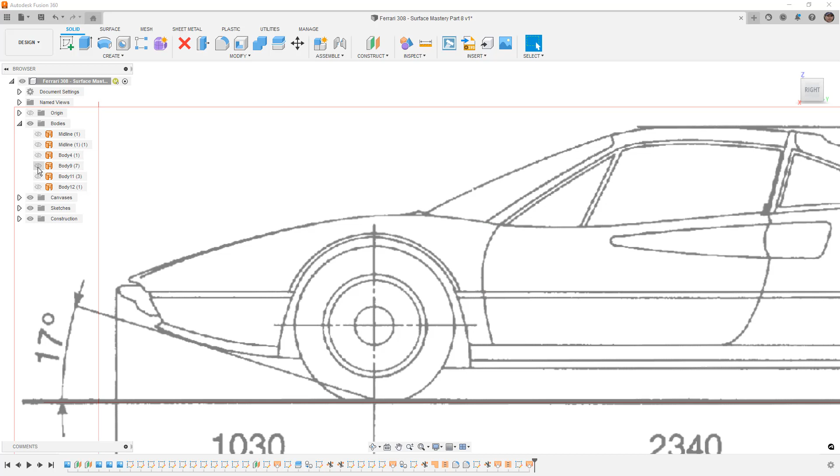This is the one that we had. Basically, we used a loft to go between one edge and the other. And the reason we're going to do this is because I want to carry on using that midline. The midline is going to be important to us because we want to use that as our reference going down to the lower portion of the fender.

So we're going to start with the back section. I want to go into my sketches and find the sketch that I used to trim out the opening. Now at this point it can be pretty difficult, because if we go back through these sketches, we might not necessarily know which sketch it is. In this case, sketch 16 has the original curves.

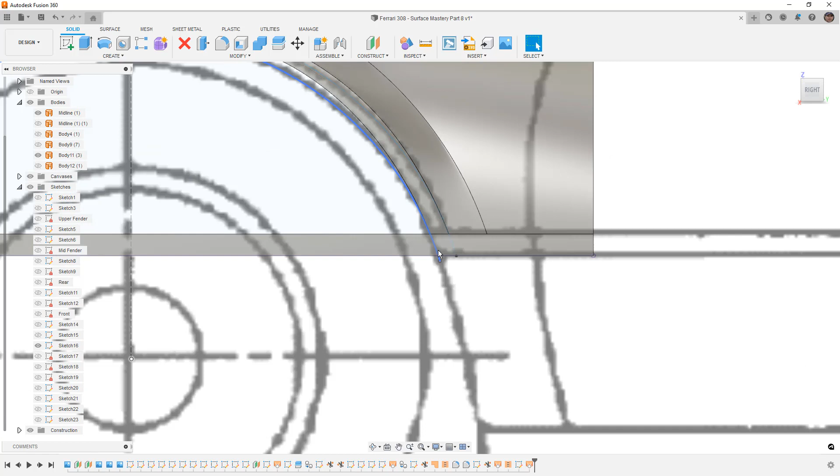What I want to do is cut out this inside portion here. The reason I want to do that is because I'm going to focus on the back section here as one piece and the front section as one, because the front is actually slightly difficult because of the way that the geometry is created here. So we're going to have to take a little extra care there.

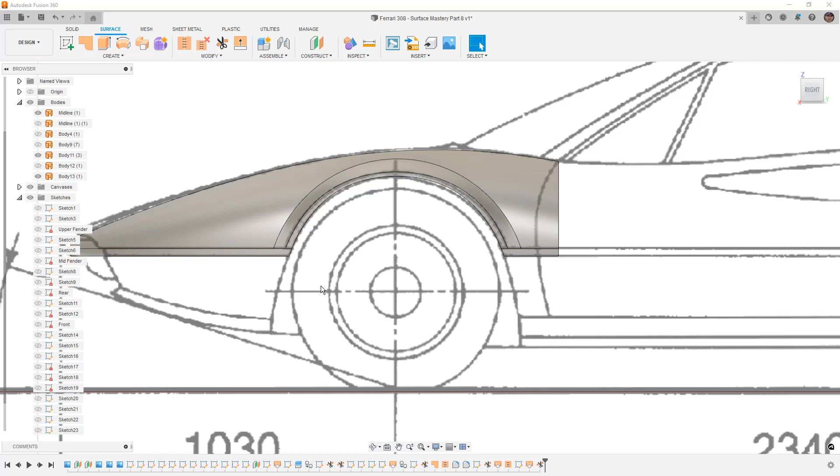So I want to use this as a trim tool. We'll go to our surfaces, trim. The trim tool is going to be that inside arc, and then we're just going to remove this inside piece. We're not going to need this surface anymore after this, so we don't need to worry about maintaining a copy of it.

The next thing we want to do is remember that the midline of this car—this is actually a recessed or sunken-in section. So we're not worried about carrying the curvature from the upper portion of the fender to the lower, but that's why we saved this extra piece here. We overbuilt the original fender so that we would have this as a reference.

So we're going to carry this edge down and follow the straight line, even though I know that's not the door seam. It doesn't necessarily matter when you're building out a car.

So the front section is tricky because we will need to trim some of this away, and we didn't perfectly follow the curvature of the car, but that's okay because we're not going to be too worried about that. But we are going to talk about how we can build out this front lip section, because this piece here actually rolls. It's not a hard edge, it's just very smooth and gradual on the car, but it does roll forward. So we're going to take a look at how we can try to accomplish that.

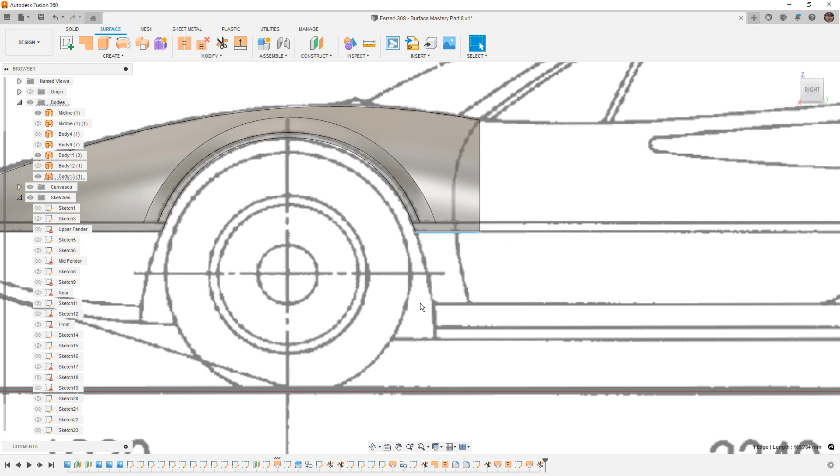But let's get started by sketching on the back side. So we're going to start a new sketch. Just pick any sketch plane you want and enable your 3D sketch. When we do this, we want to include some 3D geometry. So from Create, Project Include, select Include 3D Geometry.

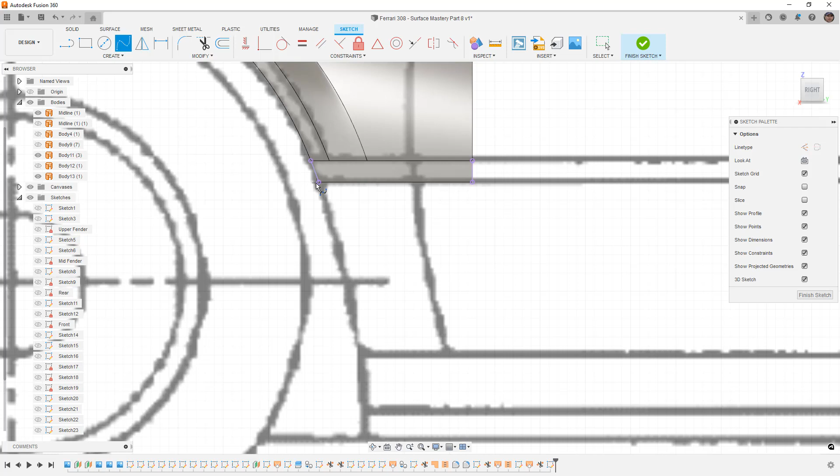And we want to select the edges of our midline surface. I'm going to right click and OK. Then I'm going to create a spline and try to snap to that point. You'll notice it's not snapping to those points here. If I rotate this around, I need to rotate it just slightly in 3D, and I'm just going to bring this line down, say OK.

We'll do the same thing here, bring it down, and say OK. So if we rotate this around to the front, what we should see is that those go straight down, because even though we're sketching in 3D, it's going to assume that it's planar unless we snap to a reference. That's why we needed to snap to those points first.

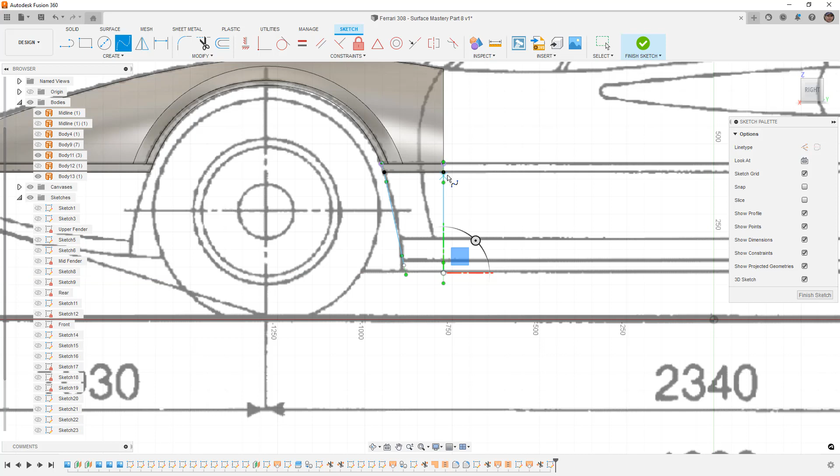I'm going to hit Escape to get off my spline tool, and build this all the way down to the bottom, even though this portion here is where the door opens. This is sort of the break point between the front fender and the sill. The sill on this car is going to be a separate piece. It's part of the body, but it's going to have its own change in curvature. We're not going to worry about it for this example - that's not really the point of what we're doing here.

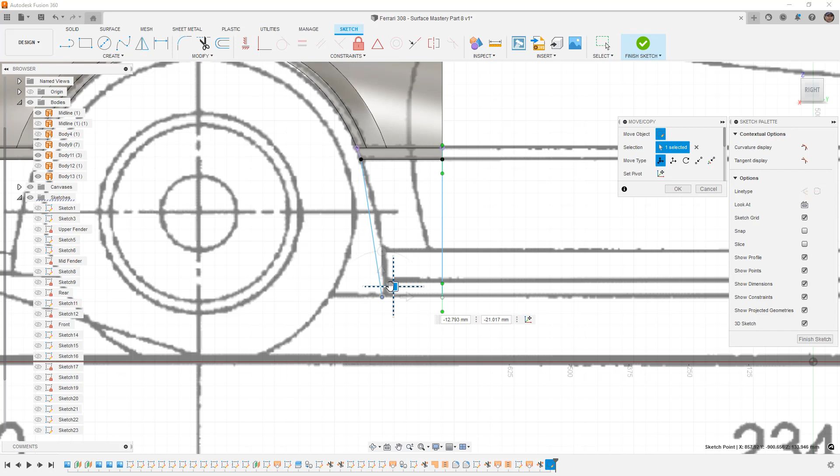But we do want to move these points down, and because we're in 3D, we can't just grab and move them like we can in a 2D sketch. We need to use Move Copy, which is M on the keyboard, and that allows me to move it. When we're using Move Copy, these handles right here, we need to activate the handle, and then we can use the Move Copy on the handle itself. The one on the back is not really going to be too much of a problem.

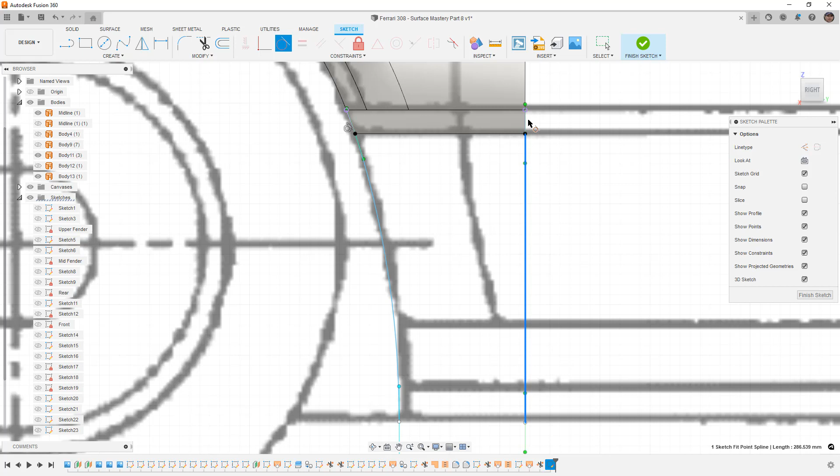Right-click and say OK. Next we want to give tangency to the spline relative to that 3D curve, and we're going to do the same thing over here. Even though this is vertical, I want to make sure that I do still maintain that. Hit Escape to get off our constraint.

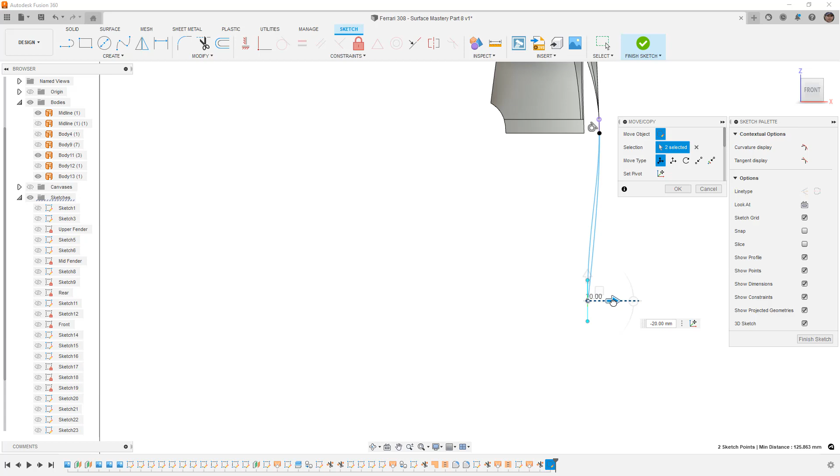We're going to rotate this around to the front. I'm going to hide my canvas for now - I don't really need to see it. But I want to take both of these points and move them inward. So I'm going to select them, say move, and just pull them in a little bit. And you'll notice how this messes up the splines - it messes up the curvature.

Now what happened here is the spline that we activated the handle on is going vertically because it was activated and it was in plane. It was basically just a 2D plane that was offset from the original origin. So this means that I need to use Move Copy and change the curvature of that. Now what I'm looking for is to get a nice gradual transition here.

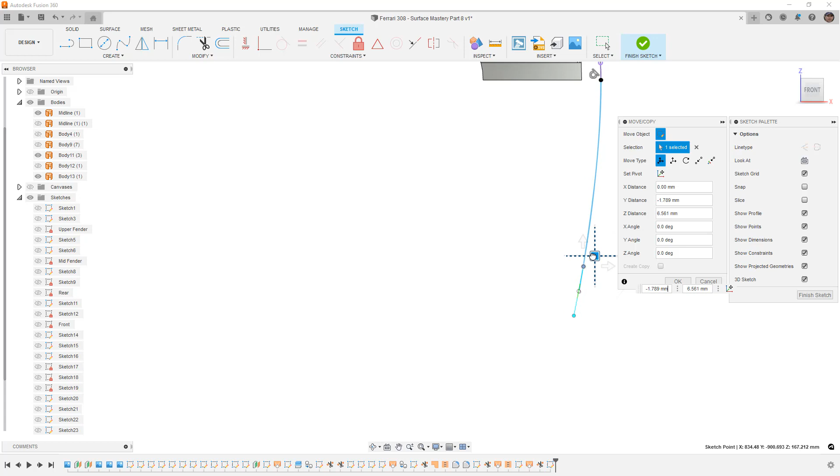Hit Escape. Actually, let's go ahead, hit Move on that. And here is where I really dislike doing this in 3D. I'm going to go ahead and move that around. Then we'll have to say OK.

The one that we didn't activate the handle on, that's essentially a vertical line, that one is essentially fine because it's going the path of least resistance. So essentially when you think about splines, if you don't activate a handle, it's going to try to invoke the curvature throughout the entire thing.

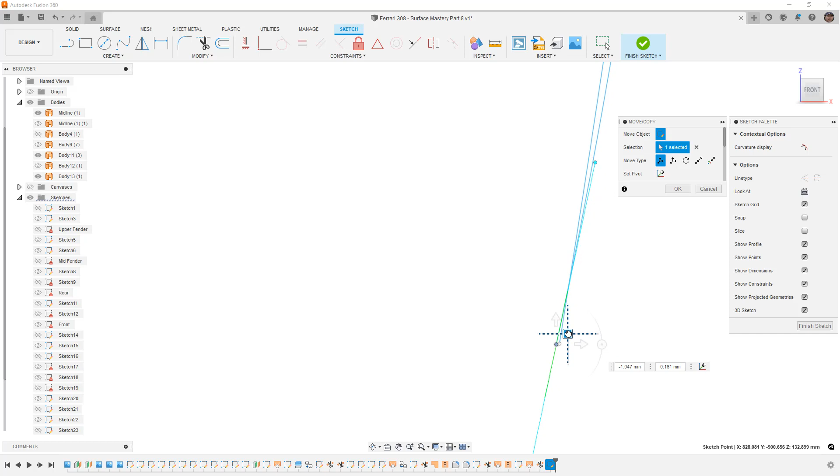We do want to make sure that these are essentially horizontal with each other. It doesn't have to be perfect, but I want to get them relatively close. I'm going to say OK.

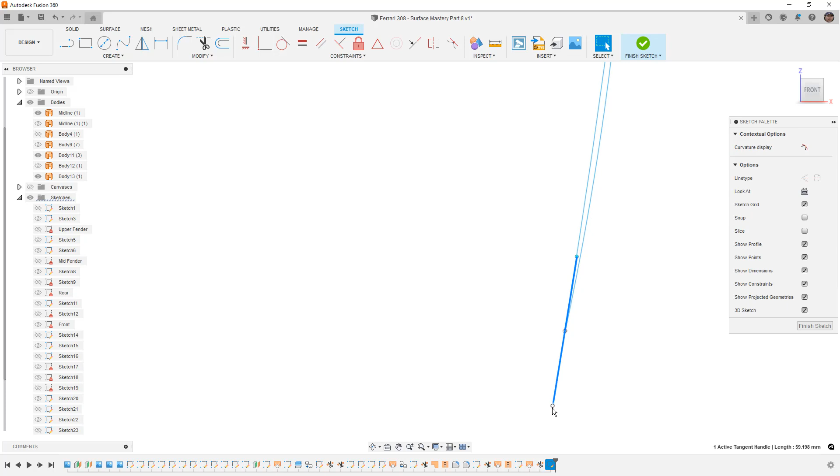I'm going to select this back one. I'm going to activate the handle, and say move. You can see that it's going to move the entire thing. But then what I want to do is move that to the handle itself. Right-click and say OK. Select the handle, one of them, and then hit move. And now I can move the handle around. So again, we're just looking to get them relatively close.

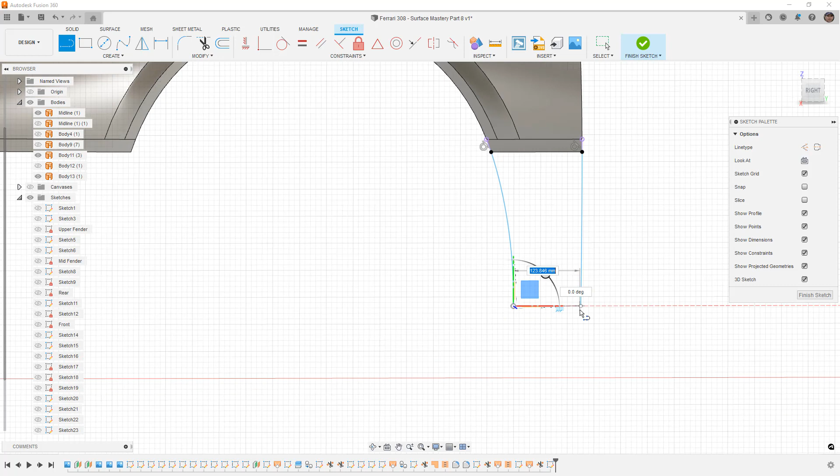From the side here, it looks pretty good. And again, we don't have to worry too much about it being a perfect line, but you'll notice that when I try to use the line tool in plane, it's not letting me select those. If I rotate it slightly, it will let me create a line between those 2 points. That line is not going to be horizontal.

If I try to use a horizontal constraint, you can see now it's added that horizontal constraint and those handles are active. If I look at it from the front, that line or those 2 points should be in a perfect line with the y-axis now. So that looks pretty good.

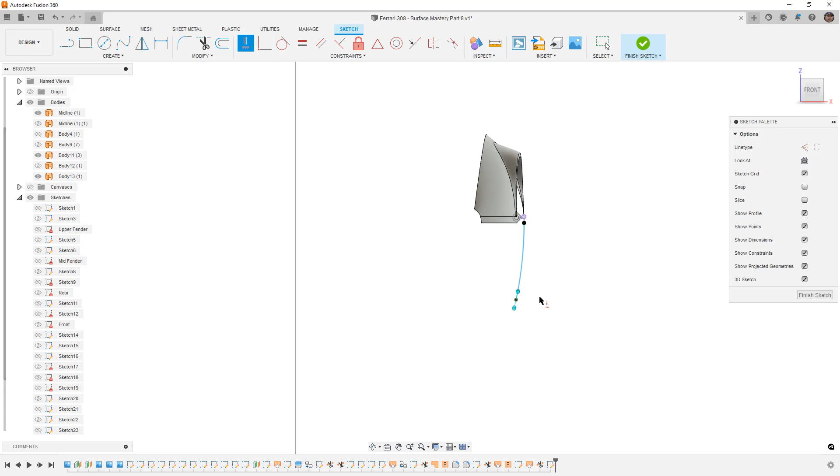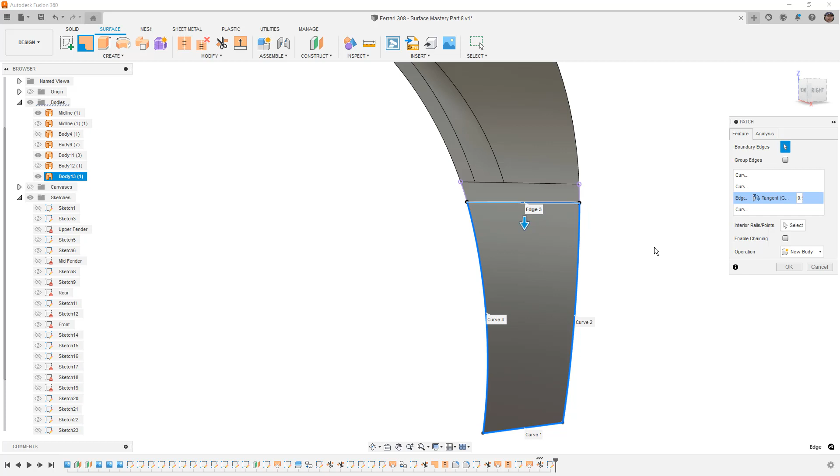What I want to do from here is finish my sketch. We can try to use a patch. We can turn off our enabled chaining, grab the bottom edge of this surface, and then grab each of these 3D splines. For this edge, we can use tangency. Because the 3D splines have tangency with the edges, with the projected or 3D included edges, we should not have any problem maintaining that curvature. So we can say OK, and now we've built out a 3D surface.

Then what we can do is take this piece and we can either offset it. Now the problem with offsetting, and I'll show you this as we look at it from the front, is it's going to go the direction of curvature. In this instance, because that upper edge is vertical, the tangency was vertical, it's not going to make too much of a difference for us.

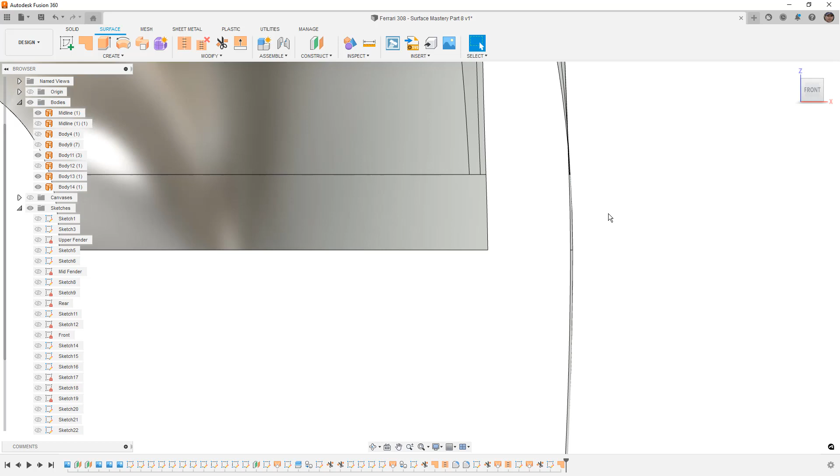But usually a better option is to select that surface, use Move Copy, and move it directly in the X direction. The reason that's a better option is because we can control which direction that's going. You also can do things like create a ruled surface off of these edges toward a direction.

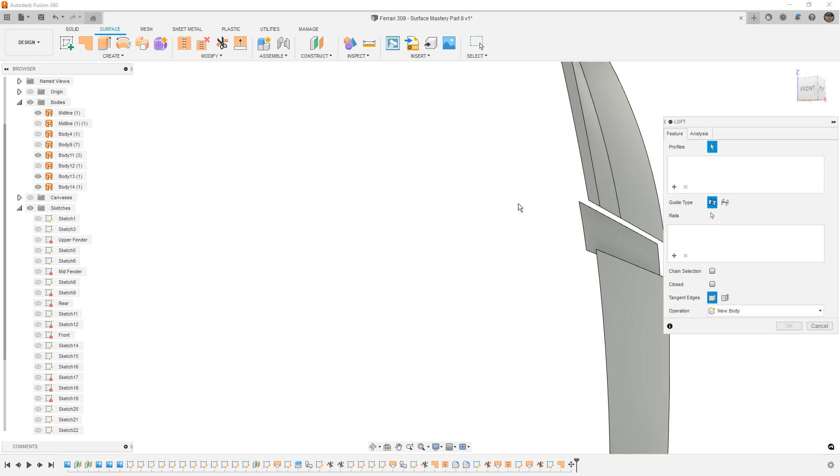In our case, what we're going to do is create a loft going from these 3 edges, which should be connected, to this edge here. We'll say OK, right-click and repeat that, and now go from one edge to the other, say OK, and we've sort of built out that little recess that we see on the body. That little piece that we kept was important because we needed it for the curvature, but now we're able to simply build out that little piece that is going to be recessed in the body.

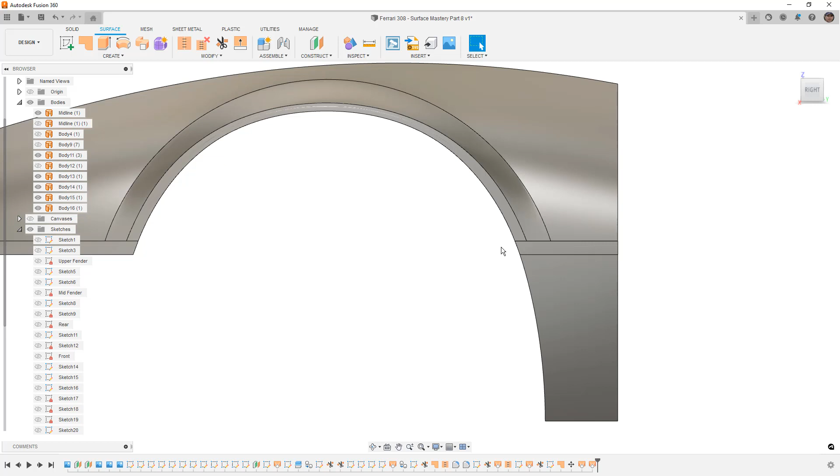That part was the easy part. The front part is where things get a little tricky. Now we have to follow the same process, but first let's go ahead and trim the front of this. To do this, I'm going to use a 2D sketch. The 3D sketch option can be on, that's okay.

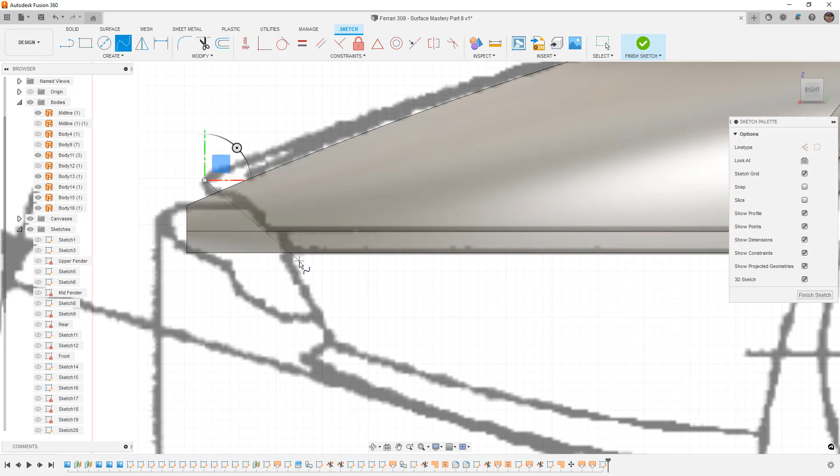But in this instance, what I want to do is just make a spline that's going to allow me to cut this. Because it's still in 2D, I can go ahead and manipulate the handles and then use it as a trim tool. I'm going to get rid of both of these front pieces. That allows me to use that sketch and ensure that I do have curvature, continuity, or tangency as we go across that trim.

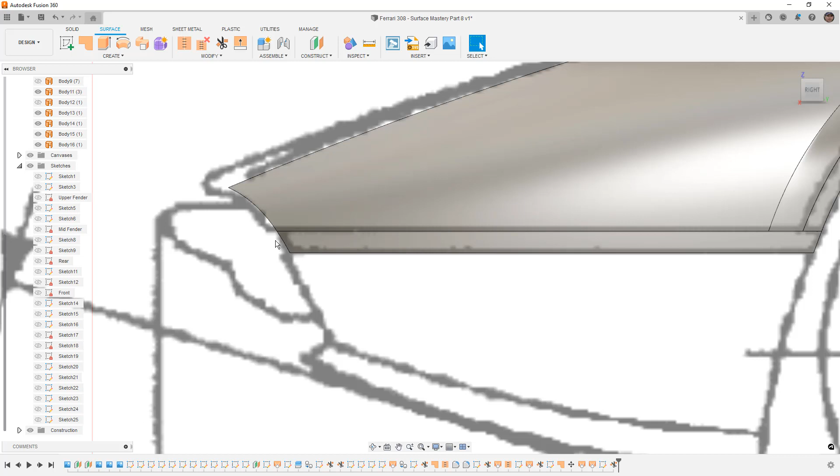So again, we didn't perfectly build this because that front section of the fender is actually going to roll over and under the car. Again, the intent is not to perfectly model this car. The intent was to talk about how we can use our surface tools. So what we want to do is just build out the fender, and think about the way in which we do this.

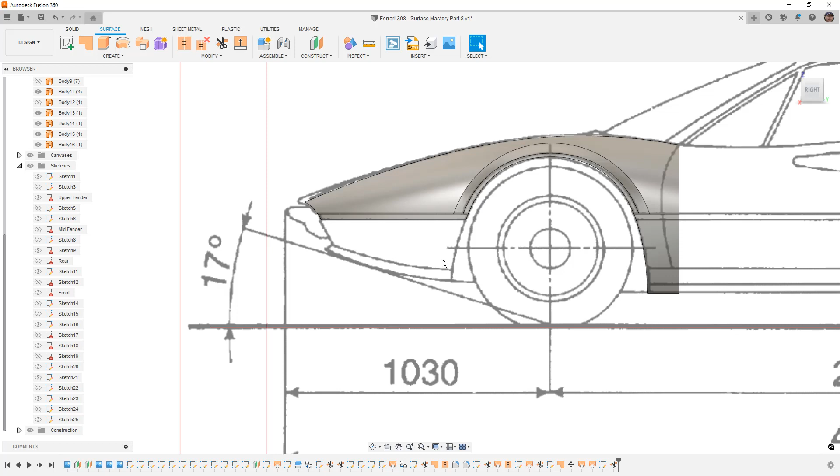Now, there is a stylized line here depending on the year and the bumper that's included on the 308. There are different versions of this. This is a pretty rare bumper, I think. Most of the ones you see have a lower front lip, a lower front bumper. It's a little bit harder to find reference pictures of this, so you have to do a little digging around. Just search online for Ferrari 308, anything from the 60s or 70s, probably 75, 76 is about where you're going to see this.

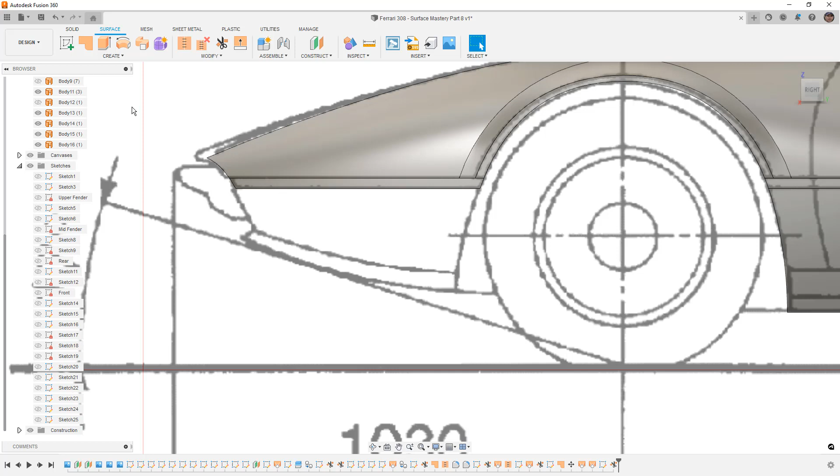But what we want to do is build out that shape, and we're going to try to do it in 3D. Oftentimes what I'll do with something like a bumper like this is build out this lower section where I want it all the way to the midline, starting here and building it forward. It gets a little tricky to do, but that's one method. The method we're going to take is to build this out with 3D curves and see if we could just get it in one shot. It's usually pretty difficult, but we're going to try.

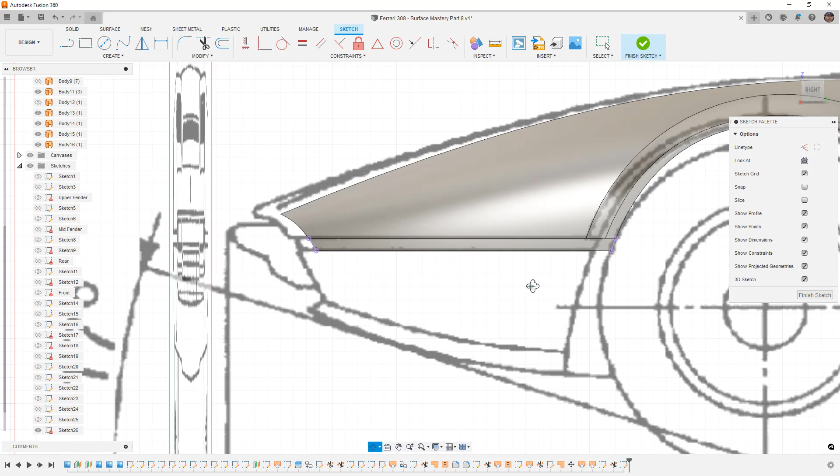So once again, create a sketch. It's going to be a 3D sketch, so make sure in your sketch palette that option is turned on. Again, we're going to go to Include 3D Geometry, grab the edges of the surfaces we're interested in, right-click and say OK. Now, once again, I'm going to build out a spline. We have to rotate this slightly, and I'm just going to build a spline that's essentially vertical. We're going to do the same thing over here. Remember, when we're doing this in 3D, we'll need to rotate the view slightly in order to snap to those points. Why, I don't really know, but that's just how it is.

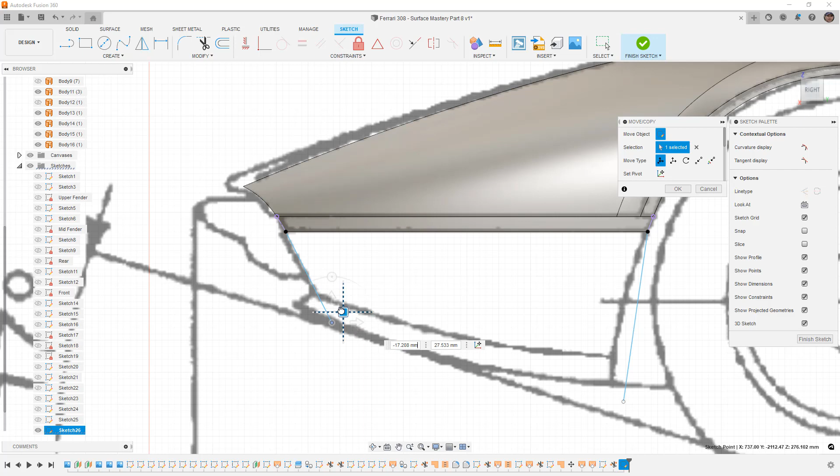Hit Escape to get off the spline tool, and then we're going to use M to move this point where we need it. So I'm going to move it here. I'm going to do the same thing back here, move this point, right-click, and say OK. I'm going to add tangency.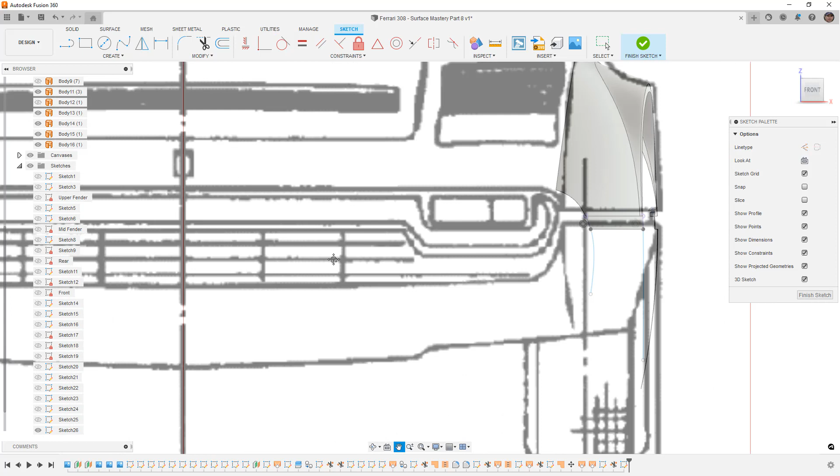We're going to do the same thing up front, since that starts to drive the directions a little bit. Right-click and say OK, then rotate this around to the front. From the front, you can see that the blueprint doesn't really match.

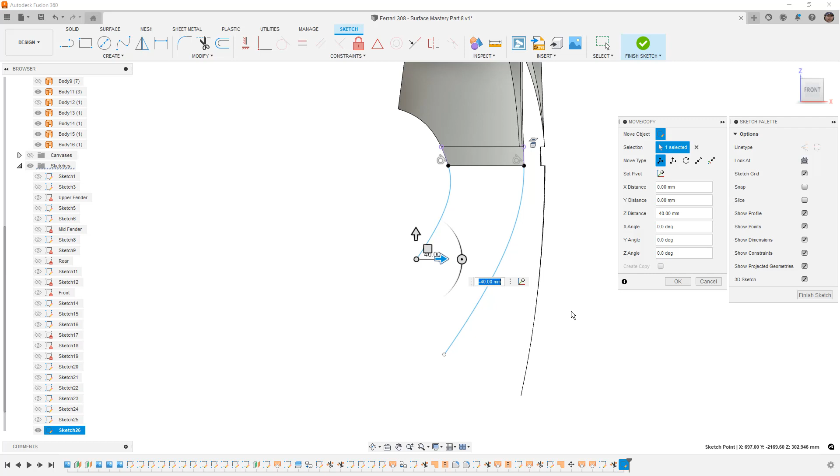This curve where we built it is a lot lower than what we see on the image. We're not going to do this perfectly because the references aren't super great, but we'll use our move tool and pull this in. The front lip or front bumper generally wraps under farther than most of the other geometry, so we'll make that pretty apparent here. We want to make sure the curvature looks okay from the front and the side.

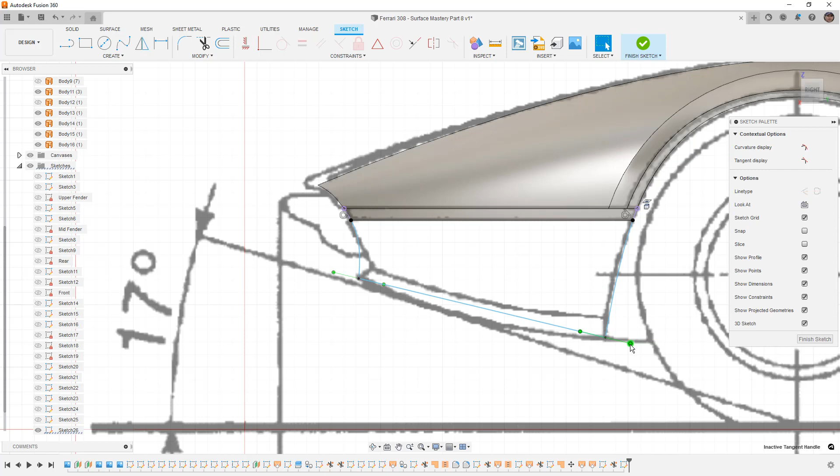I'm going to turn the canvas on and create another spline, rotate slightly, go from here to here, say OK. From the right, it's going to look essentially like a straight line, but that's not what we want. So we activate this handle and change the curvature to essentially look like that shape we're seeing.

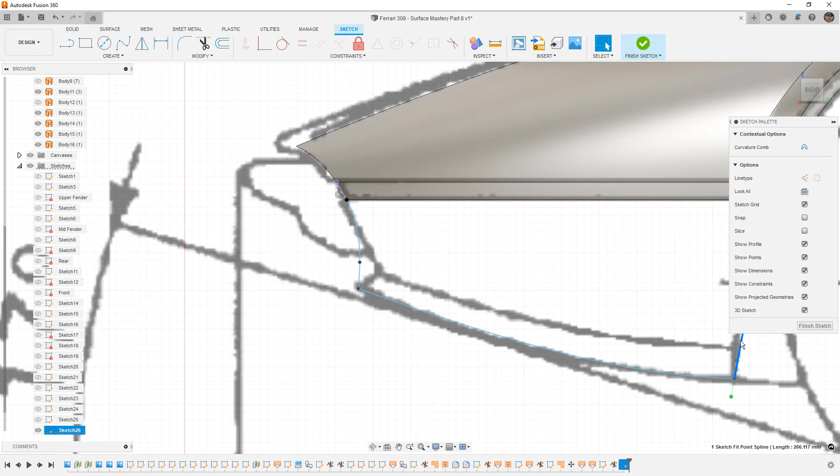The other thing we need to do is figure out how to get this front lip and a guide curve to help drive the shape. To do that, we select the spline, right-click, and insert a point there, then right-click and say OK. I'll select the spline on the back, right-click, insert a point, put a point there, and say OK.

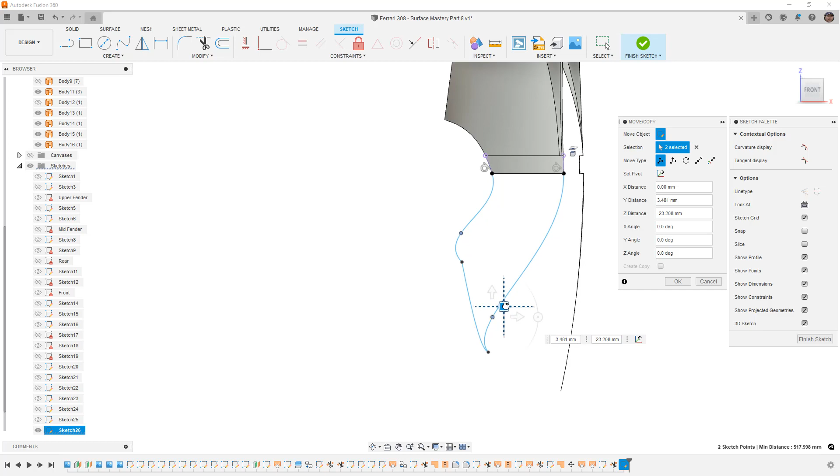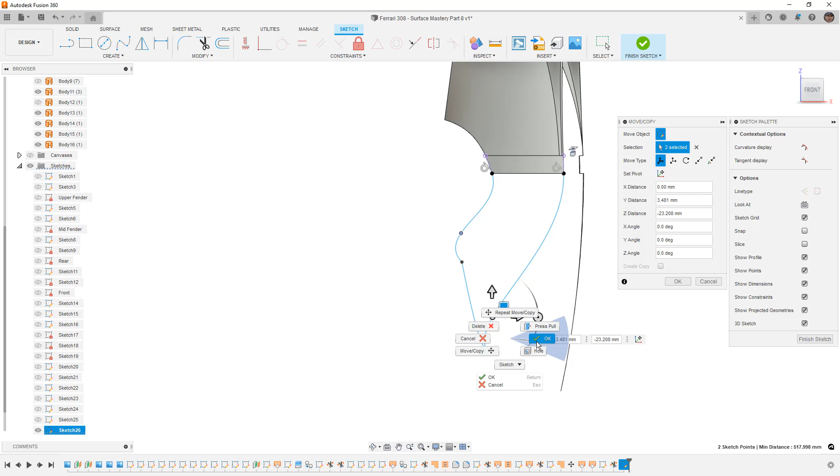These points represent where the curve is that's driving that lip. I'll turn the canvas off, select both points at the same time, and move them inward. You can see what it's doing to the rest of the curvature since we haven't activated any handles here. It's always important to minimize the amount of tension on these splines. If you're building this out with the same method, having all these interior spline points activated makes it much harder to build these surfaces, so I was very careful and mindful of that shape.

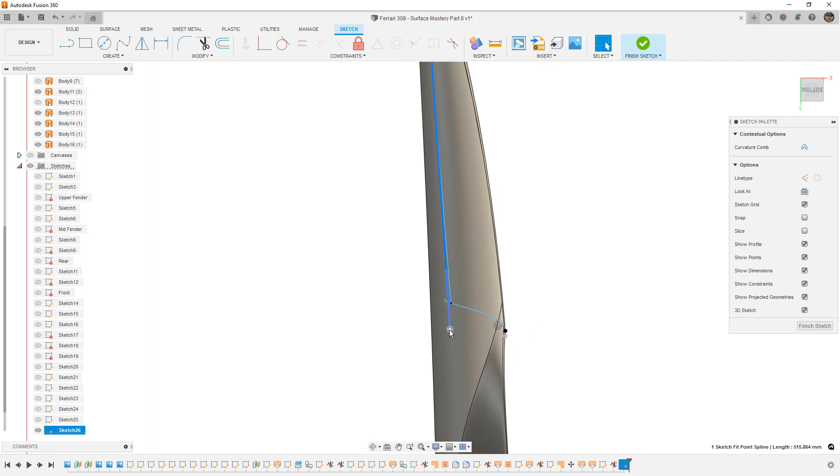I'm going to create a spline, going from here to here, which is again essentially a straight line. Looking at this from the bottom, I hit escape to get off the spline tool. Then we think about whether this is a straight line or has some curvature. As we rotate this around the bottom edge, I activate that back point on the handle and change the curvature so it gradually arcs inward.

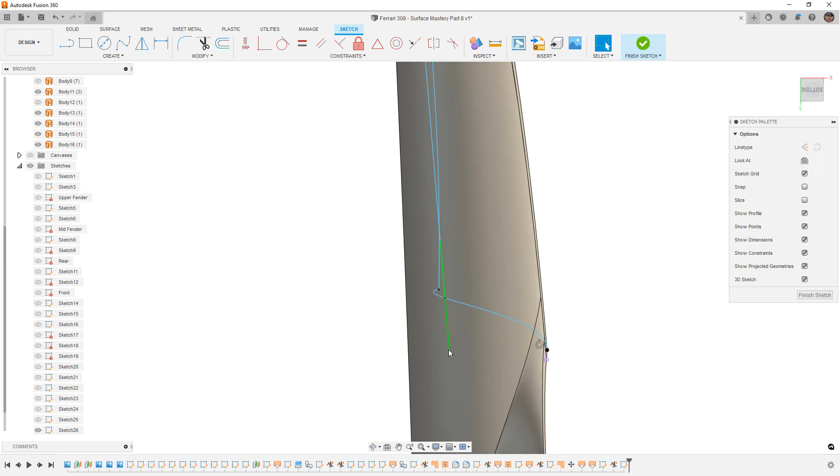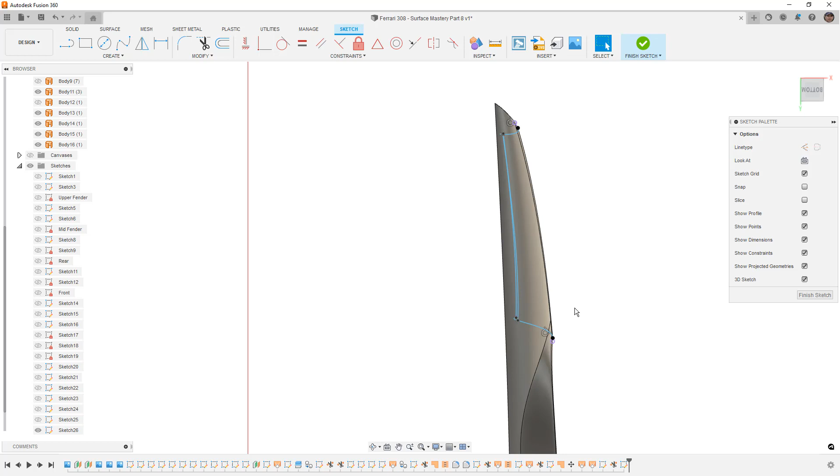For the extra spline, I click on the handle, move copy, right-click, and try to just move it a little bit and activate it, then hit escape. This is the problem we run into with these 3D splines—they really do not like to be moved this way, so it's a little finicky and you just have to get used to it. If anyone has a better way, please let me know. This is always how I've had to do it: grab them, move a little, and activate that handle if it hasn't already been activated.

Let's look at this from a right view. We can see this isn't looking great, so we need to make some adjustments. Once again, a little tweaking here. They look relatively close, okay. Not ideal, probably not perfect, but let's see what it looks like.

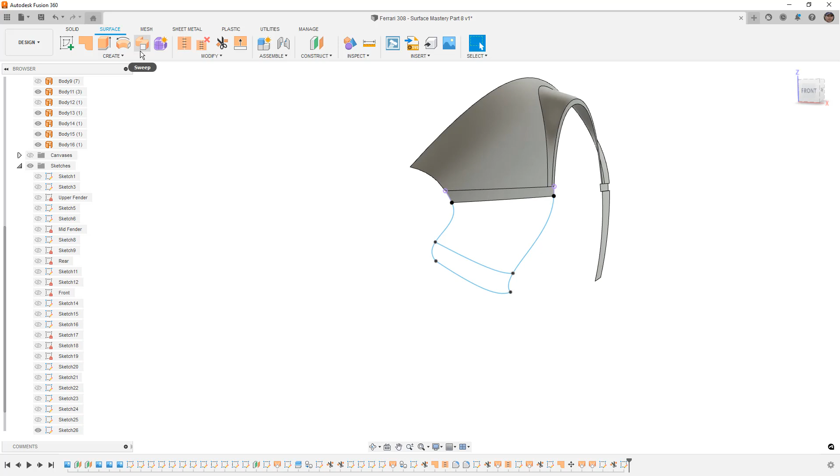We're going to create a loft, going from this back curve to this front curve. For my rails, I'll grab that top edge, which we can have tangency with, then grab these interior rails. For the top edge rail, I can have a tangency constraint, say OK, and that builds out that extra piece.

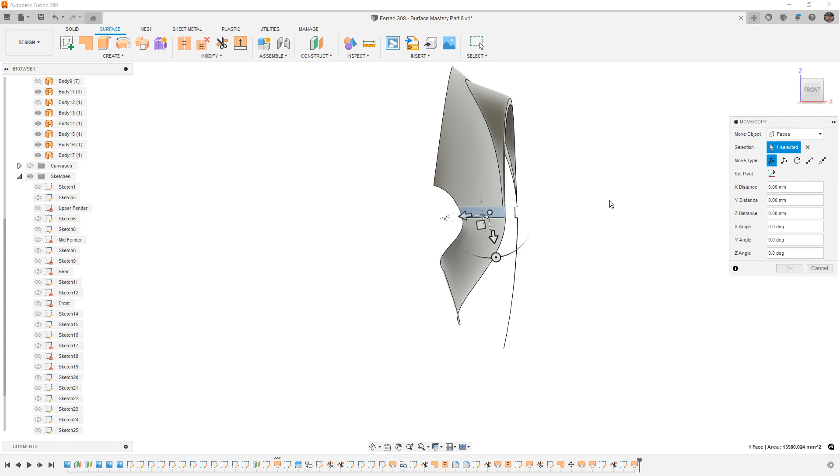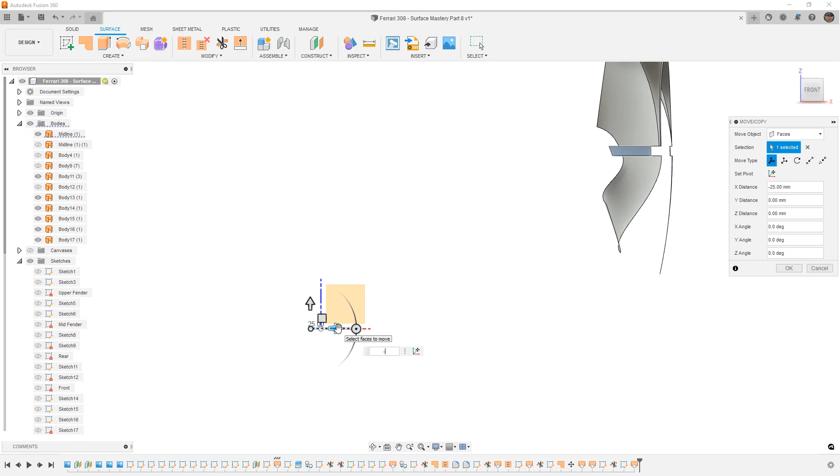This piece here, I'm going to move it. Notice that when I move it while selected, it tries to move in a different direction. We'll reset the pivot point by enabling the origin, selecting it, and hitting the green check mark. That lets us use the origin direction. Then I can move this in—in this case, -25, I think that's what we did on the back. I'll make sure the origin is hidden, rotate this around, and create some lofts between.

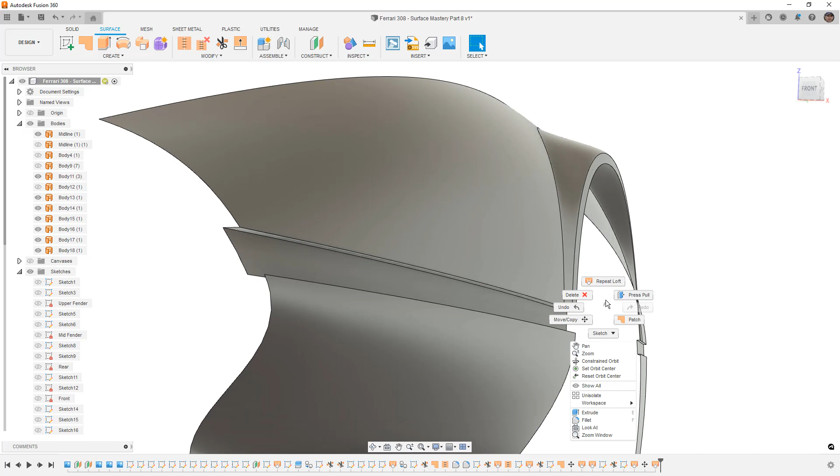Now we can't use something like a patch here because the patch needs to have a complete boundary, whereas loft will let us have it open. It doesn't really need that boundary. So we're going to right click and repeat. This should just be two selections here.

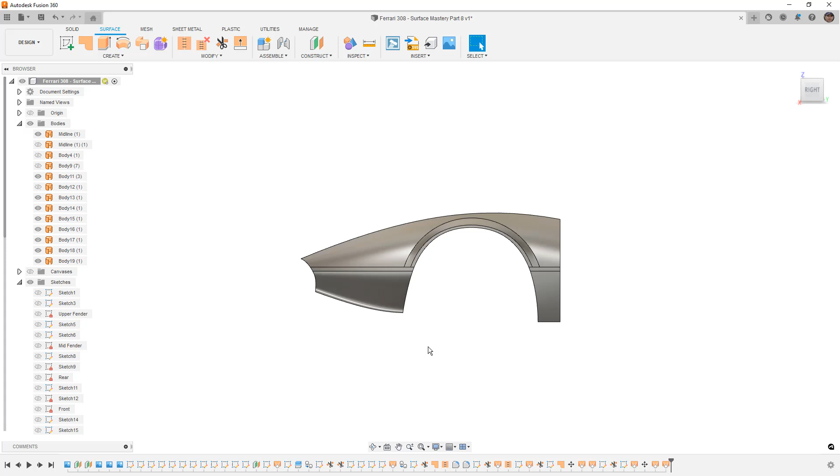And now we've built in the upper and lower portions. Now, once again, this is not perfect. There are things that we sort of didn't do just because the intent is not to model this entire car. But what I wanted to show you is that we can carry on with the geometry we had, using these 3D curves to help build out the shapes.

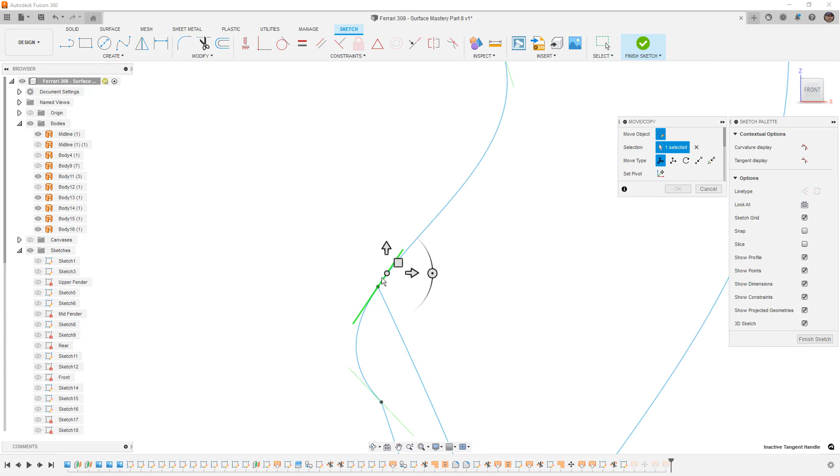It's a little bit tricky for us to do a change in direction like this. You'll likely find that you would want to go back and potentially make some changes. So for example, with this sketch here, if I were to activate this handle, let's go ahead and move it just slightly and right click and say OK.

We're going to select that endpoint of the handle. And if we pull this in, which means it's going to reduce the tangency influence, reduce the weight, what that's going to do is tighten up that transition.

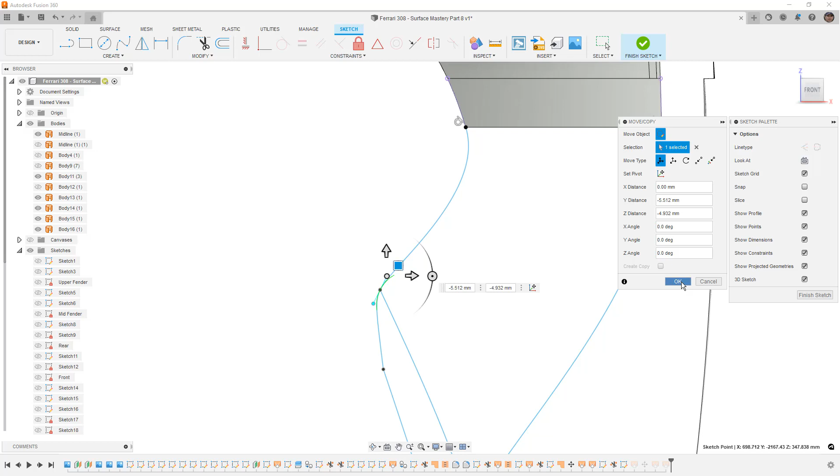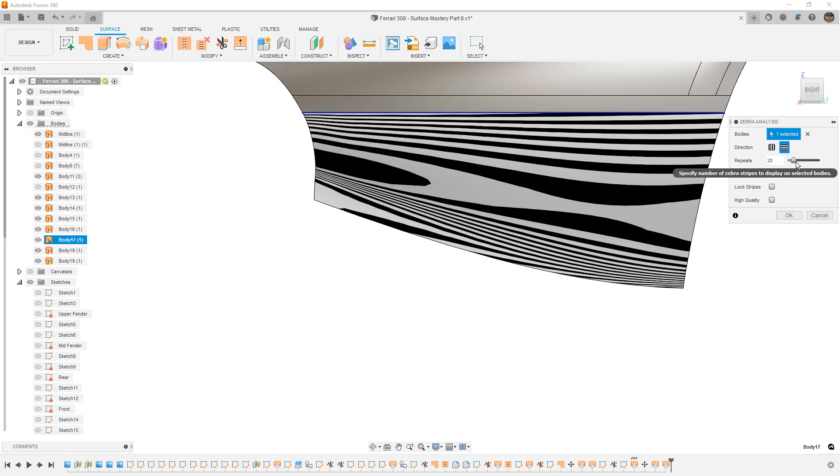So when we finish the sketch and it rebuilds the surface, what we should see is that the reflection, the light, ends up getting a bit tighter, a bit more defined up here, and it sort of fades away back here. So if you go to inspect and turn on zebra stripe analysis, and we add some horizontal lines, what you're going to see is that if we increase the repeats, these lines are going to get tighter together up front.

That's because we reduced the influence that that tangency handle had. Instead of saying it's going to pull a full amount, let's say 1, it's only pulling maybe 50% or 25%, whereas the one at the back is still very gradual.

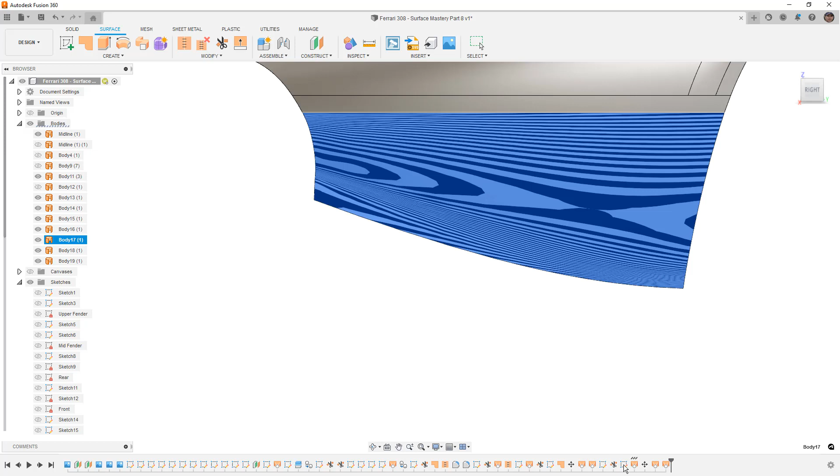So if you wanted to play around with these shapes a bit, you could always go back in and manipulate those handles. So for example, if we did the same thing to the one on the back, this handle, move it just slightly, and then right click and OK, select that end handle.

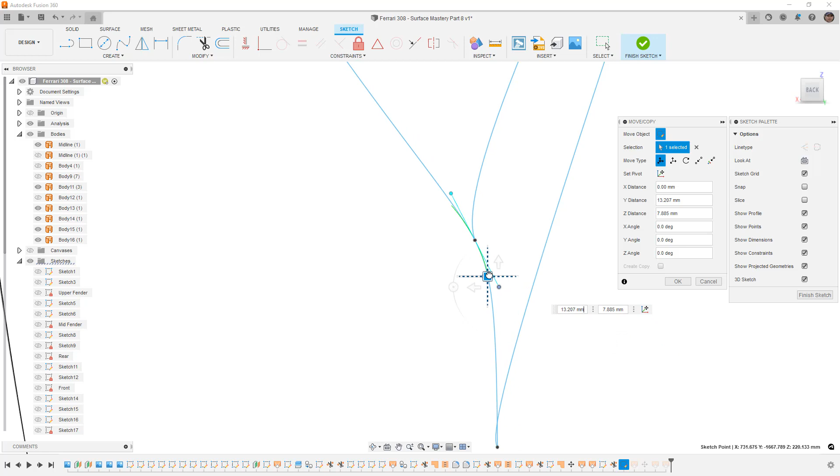Again, if we tighten up that transition, we're fundamentally changing the way that surface is built. So by tightening both of those up, we can now see that the zebra stripes are staying in line, which means that if we turn the analysis off, we have a tighter transition in that area.

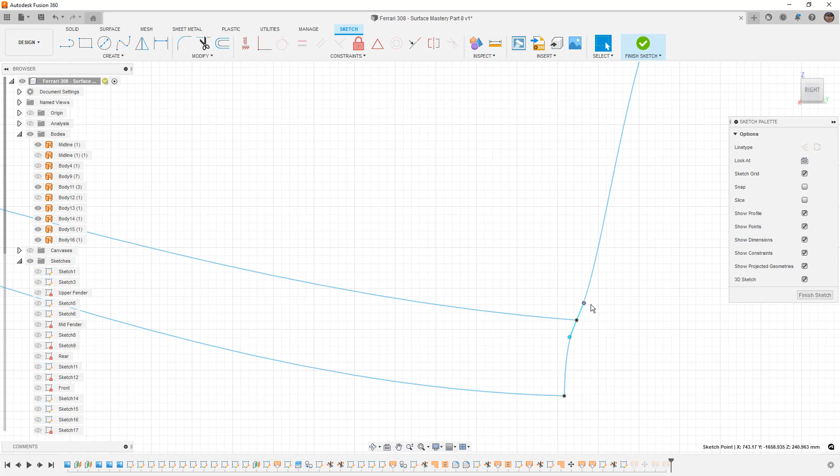Now, it does have negative effects. You can see what happened. That back edge is now wavy, where before it was nice and smooth. So because we're doing this in 3D, you would need to really take some time and play around with these handles to make sure that you do still have the proper curvature in all directions.

And for me, that still comes back to doing it in 2D. I still like to come back to viewing each of these as 2D splines and playing around with them in 2D, and then manipulating them, looking from the side and looking from the front or the top or bottom.

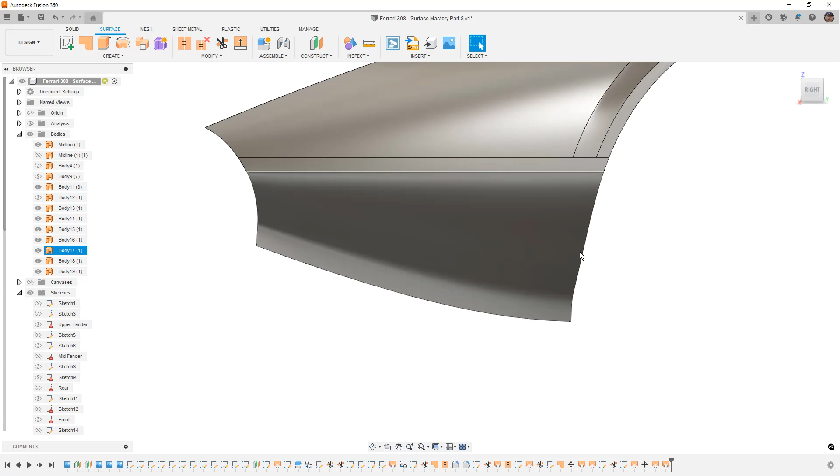So at this point, once again, I'm going to say it, I'm not planning on carrying on with this fender. I don't plan on doing any more with it. I know I'll probably get more questions and people want to see the entire thing modeled. The truth is that to model a car like this takes quite a bit of time. It's going to take many more hours.

We did the Ferrari 308 series. We did some on a Subaru WRX. We have the Porsche 911 series, which was 10.5 hours. That was 6.5 hours on the body using forms. You can multiply that by 5 if you try to do it with surfaces.

This fender would have taken 10 minutes for me to do as a form, but instead it's going to take 45 minutes to do as a surface with sketches. Even if you're doing 3D sketches and 3D splines, which can be a bit quicker, it's still going to take a considerable amount of time to model a car in this way.

And because the surfacing tools in Fusion are not true Class A surface tools, they do have some limitations with things like patch not being able to work on open selections, or having issues where you can't use a sweep with curvature continuity. You can't say it's tangent or curvature continuous. It means that we have to make design decisions along the way that complicate the process.

So for me, I don't think it's worth the time to go down that route. I want to focus on surfacing tools that apply to a whole range of things rather than just car modeling.